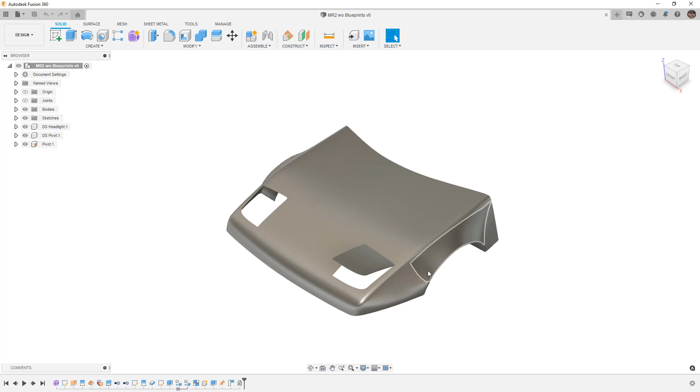I had a request in the comments about creating the bezel or the headlight surround for a pop-up headlight. Since we just finished the Ferrari series where we actually had a car with pop-up headlights, I thought it would be a good addition to maybe talk about some different tools and techniques that we can use to create that.

So what we have here is the front end of a 91 to 95, so the second gen MR2. So this is a car that still has pop-up headlights, and in my opinion, it's the best looking MR2. The first and the third gens just didn't quite have the same lines and looks as this car. So happy to get started modeling this and talk about the process.

Before we get started modeling everything, I want to take a second to talk about what I've already done in case you are starting out and you want to kind of backtrack with the things that I've done. So back to the original form body, I created a form body, and of course this is a surface, and I just used the same techniques that we used for the Ferrari. You can go in and you can modify this and you can add to it.

Some important differences or distinctions to this is I used a lot less control in the fender area. And the reason I did that is because this car has a relatively smooth transition from the wheel wells. This time frame, the early 90s, cars were starting to get really smooth. The FD RX-7, the 300ZX, 3000 GT, these cars had harder lines in some areas, but they were relatively smooth. So that was kind of fitting for the era. We didn't have any creases or hard edges like we did on the Ferrari to deal with.

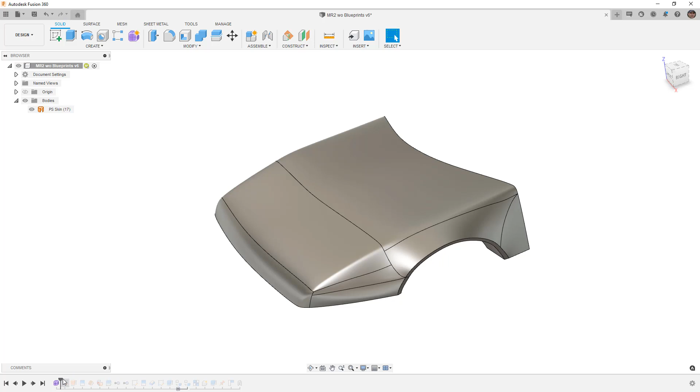So as we moved through there, the next thing I did was I created a sketch for where the pop-up headlight break should be. Now, we talked about this at the end of the Ferrari series, and sometimes you can use the trim tool or you can use the split face tool to actually split bodies up, but sometimes it just doesn't work. So I just went ahead and created some extruded surfaces, and I used those as my split tool.

Now, the original reason I did this is because I was intending to use these surfaces as part of the headlight surround, but I sort of abandoned that as I went further in the design. So I decided not to do that, and I ended up creating what we call a skin. So if I hide some of these bodies, what I did was I created basically an offset surface so that I had a body or an offset surface that I could use for the headlight bucket, and then I could delete the face and the body.

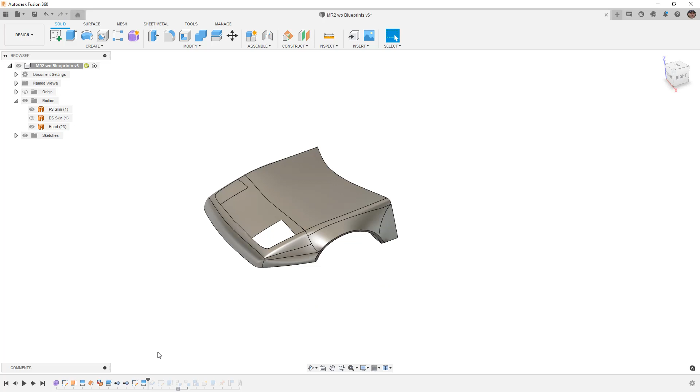I ended up splitting the other side using the same method, and then I started by creating a sketch to trim up the hood line. Now, this wasn't strictly required. I just did it for aesthetics. And then I just split the rest of the surfaces, so I had sort of a hood line. So you could pop up or remove the hood using the same techniques by creating an offset surface.

Next, I created a thickened version of the headlight. So if we hide the hood, you can see that we actually have something that has some thickness here. And in reality, this is essentially what you would have for the backside plastic piece that covers the headlight. And then I went in and I created a very, very generic pivot point for the headlight to pop up and down. I created a pivot shaft.

I converted the headlight bucket in this piece to components. Now, in reality, I could have started with them as components, but because I was basing this off of a form body that was a surface, I really didn't feel the need to start them as components because I was already hacking them from something else. And then I added a rigid group so that they moved as one.

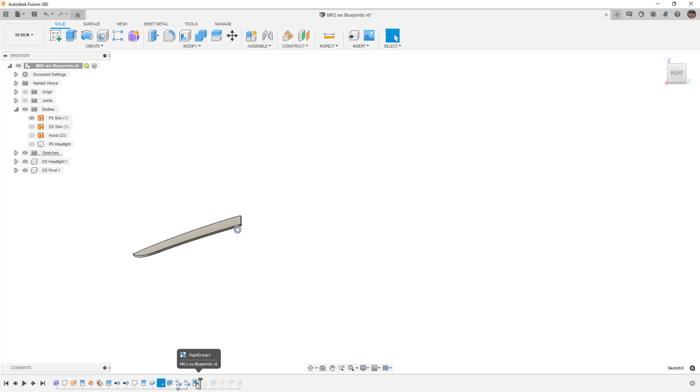I created a new component for the pivot itself. And again, very, very generic, just a rod, only just to represent the movement. I grounded the rod, and then I added a revolute joint, and I have a joint limit for the revolute joint.

And then you can see here that now the revolute joint has the upper limit, so it can't go any higher than this, and then it stops at the hood. So I did that by setting a joint limit, and you can do that by right-clicking on it and editing the joint limit. In this case, it was about a 28-degree sweep.

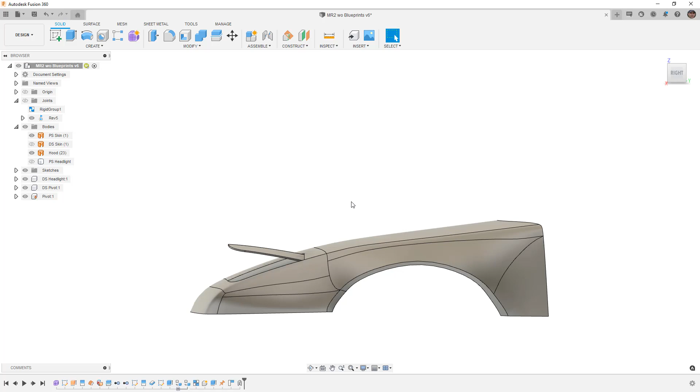On the actual car, it actually pops up a bit more. It depends on the car, obviously, but in this case, the original pops up more. But the request was to create a headlight surround for what's considered a rogue headlight kit. So it takes from the original square headlight design to a dual circle headlight design. So that was the request, that was the ask, and that's what we're going to do.

So I wasn't too concerned with having it pop up the exact amount. I really just chose that because visually it looked about right for what these rogue kits look like. So now that we understand what has been done, let's talk about what's still in here and what we can do. So I left what I call the driver's side skin in here, which was an offset copy of the split.

And I did that because in a lot of cases, you'll see when these headlights pop up, they'll actually try to match some of the body line and roll up into whatever shape they're doing. So I kept that there in case I needed it as either a trim surface or a reference. And I also have the original passenger side skin and the passenger side thickened headlight, which I didn't really add any joints or components to. I'm only working on this side over here. So that's where we are at.

That's the starting point. And now we're going to talk about different ways in which we can make the skin. The first thing that we need to do is have some sort of plane or planar face that we can use to define where the new headlights are going to be. And I'm going to do that with a surface. It could be done with a plane. The surface is helpful because I want to potentially use the surface as part of the rest of it.

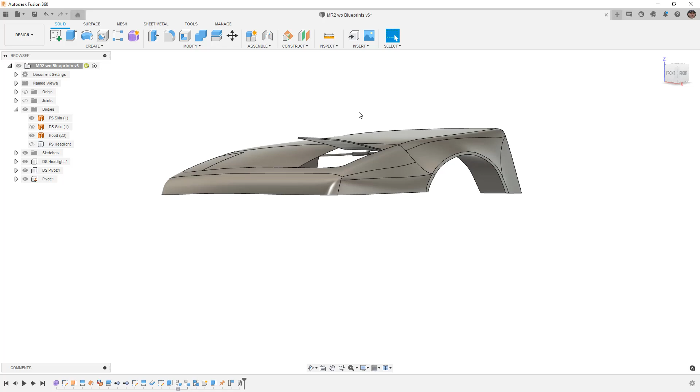Now, I will put a disclaimer in here. I haven't modeled this yet. This is the first time that I'm trying it. I've modeled the front of the car and the pop-up headlight part, but I haven't actually attempted making this bezel. So what we're going through here is my idea of how I would go about it, and hopefully it works, but we're going to just go along for the ride.

So we have to think about if we want this new bezel piece to be its own component or if we want it to be part of the driver's side headlight. Now, in reality, it could be a sub-assembly of the driver's side headlight pop-up piece and the pivot and all that stuff. So I'm going to make a new component, and I'm going to call this new component DS for driver's side headlight bezel. And that new component, I'm instantly going to go back to the top level and deactivate. And I'm going to make one more component. And this new component is going to be DS headlight assembly.

And the reason I'm doing this is because I'm going to restructure the browser a bit. I'm going to go ahead and reactivate the top. And even though we're talking about design techniques for modeling the bezel, we're going to get into some other basic assembly stuff as well. The reason that I want to do this is because it's going to produce a few problems, and I want to make sure we understand why those problems arise and what we can do to fix them potentially.

So now we have this assembly, DS headlight assembly, all the work that we've done before. We've got these components here. We've got a joint that is limiting it. We've got rigid groups and so on. But now I want to put the driver's side headlight, the pivot, not this main pivot. I'm going to leave that as part of the top level. This bezel, and I'm holding down the control key when I do this. I'm going to put those three, and I'm just going to drag them into the headlight assembly. The icon changes. Now this is a sub-assembly. And if I try to move this around, it's no longer joined together.

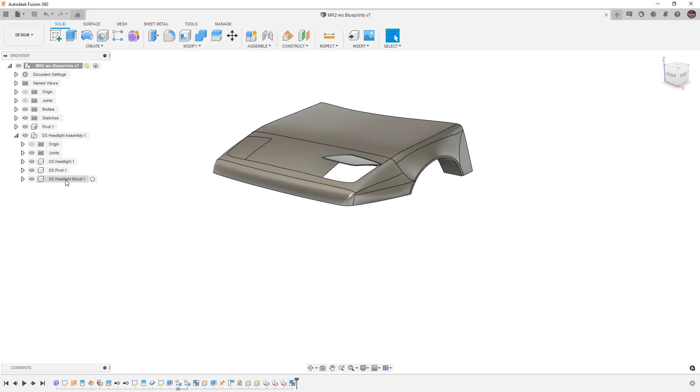All right. So the next thing we're going to do is activate the DS headlight bezel, the new component we created, which is currently empty. No sketches, no bodies, nothing other than its origin. And again, it's the same origin as everything else. Now that this is activated, I'm going to create a new sketch on the top plane, because I need to create the plane that my headlights are going to be on.

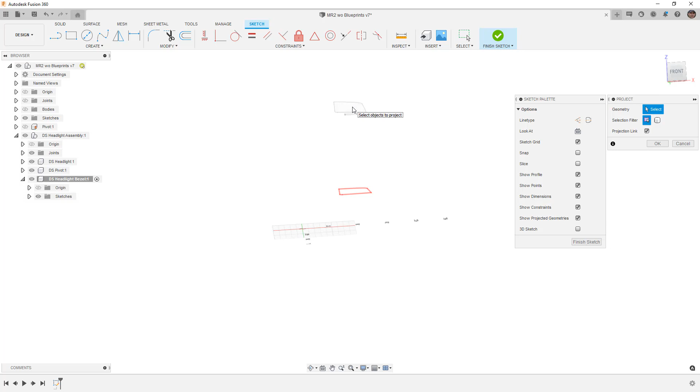So we're going to create a line, and I also want to use create, project, include, and project. I'm going to hide the entire bodies folder, and I'm going to hide the pivot. I don't really need to see that. I'm going to rotate this around. You might need to zoom back a little bit, noting that it's pivoting about the origin. I'm going to select that entire bottom face now that we're projecting and say OK. This redoes my grid, so now the grid is including this.

And if you are worried about the origin location, you can actually move the entire component so that the origin is based off of something real. This is based off the center of the car. When I drew this originally, I grabbed some very low-res blueprints online, but the blueprints were not under Creative Commons, so I deleted them out of the file before I shared it. That's how I know the shape of the headlight, the blueprints are just gone. So that's why everything is based off of that center point.

In reality, when you're modeling a car, that's usually how you do it. You pick the center of the car as the origin, but it doesn't have to be that way. You can put the origin wherever you want. It doesn't matter for what we're doing, because all we're concerned about is shapes of what we already have, and some references that are horizontal or vertical. So make sure you understand that the projection of this headlight is based off the bottom face of the headlight, and on the headlight in its up position.

That's going to be important because that profile does change. So it's in its up position. We understand exactly what the shape of this thing is, and we're going to design the bezel for that up position.

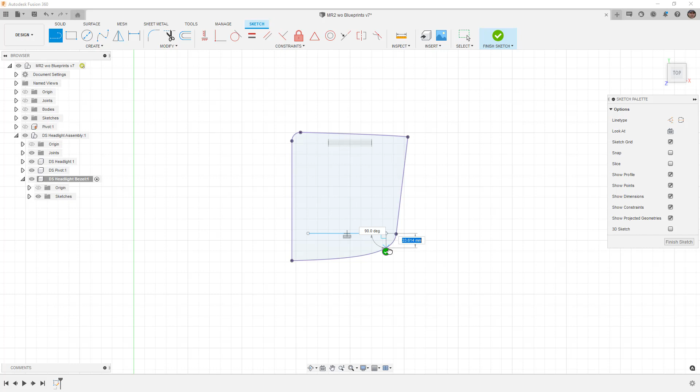I'm going to grab a line, and this is going to be a horizontal line. We can decide if we want it to go all the way to the profile or if we just want it to be inside somewhere. I don't really care so much about where it is—I want to make sure it's horizontal in relationship to my coordinate system.

That's how the car was drawn. I'm going to hit escape to get off the line tool. And now I need to decide how wide this thing needs to be and where it needs to be.

So this is where we're going to determine the plane of the headlights. In some cases those will be pretty close to the front. In most cases they'll be back behind some curvature, and then the bezel needs to come out from there. Because that's the challenge, that's what I'm going to do.

So we're going to use D on the keyboard. I'm going to set this at an arbitrary value of 175 millimeters. I'm going to put a horizontal distance from this point of 32, only because it looks about right. And then I'm going to either use horizontal or coincident constraint.

In this case I'm going to use coincident, because this is something most people don't know to use on things like this—so coincident for this line and this point. The reason that works is it's going to essentially extend the line out until it hits that point.

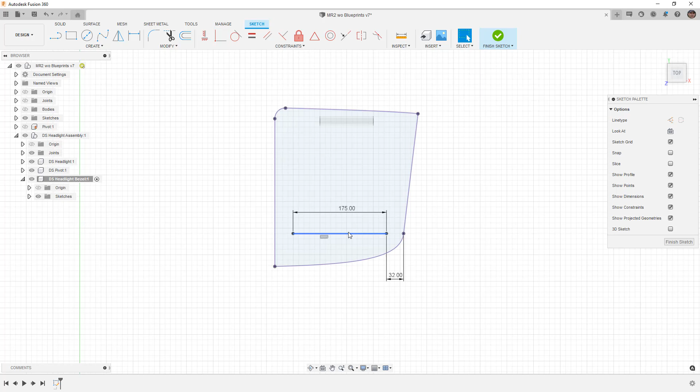We could have used horizontal here, and that would have worked as well. But I like using that trick, especially if you've got something at a funky angle.

For example, if we had some sort of pattern we were drawing and we wanted all of these things to point towards the center, and horizontal didn't work, you can use coincident to always have those pointing toward the center—like if you're designing a rim or something with concentricity, you want to make sure those lines point at the center.

All right, so now we've got this. I'm going to finish the sketch, and from here I'm going to move into surfaces. We could do a solid body, but it's not really needed yet, so I'm going to do an extrude.

I want to go back to my bodies folder. I'm going to expand this and bring in the DS skin—that's the driver's side skin.

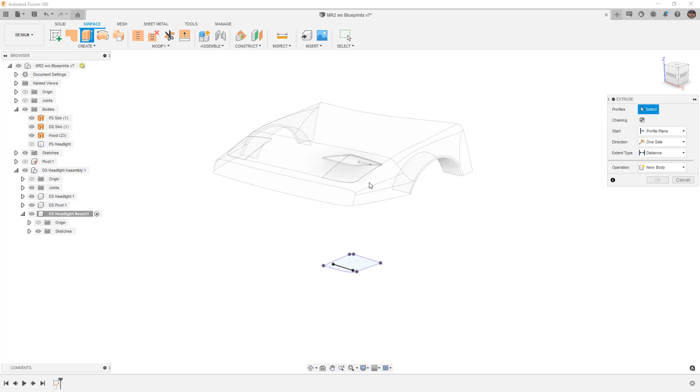I don't necessarily need it, but what we could do is take this line and start at this object—start here—and then move the extent type up to another object, and use the underside of this face.

So what we've done is created something where we don't have to go back and trim, scale, or split. We've simply gone directly from the original—the popped down or folded down surface—to the folded up surface.

The great thing about this is it gives us a planar reference, which means that if we select the surface—even though the top and bottom are not horizontal lines—we can right click and create a sketch directly on here. That's exactly what we're looking for.

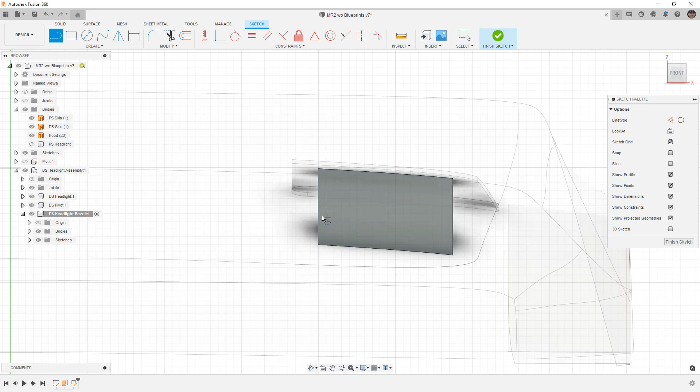So we're going to create a sketch, and now we need to represent the headlights. I'm going to use L on the keyboard for line, but you can also come up to create. And I'm going to grab the midpoint on the left side.

I don't really need to, but I'm just going to go all the way to the right, making it perpendicular. The only reason I have this here is it's a reference for me just to snap to, and again, I don't really need it.

I can select it and make it construction—you can use X on the keyboard. And then I can decide where I want my headlights.

If I want a larger headlight here and a smaller one there, we can give these dimensions as well. I'm going to use D on the keyboard—let's say we make this one 50 millimeters, which is roughly about 2 inches, and let's make this one bigger, let's make it 75. And if we want to, we can define their position, right?

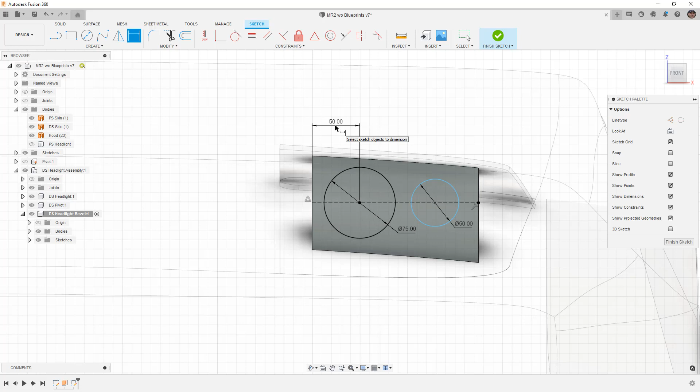We can give them a 50 millimeter dimension here, and then maybe we want to do 50 from this side as well. So now what we have is the location of the headlights, but we need to get rid of that information. So we either need to split the body or trim it or do something.

I'm going to use the trim tool, and the trim tool is going to be this sketch, and then I need to select where I want to remove. In this case, I'm going to remove the center. The trim tool is one of the only tools that I am aware of that leaves the sketch visible. Most other tools like extrude or revolve are going to make the sketch hidden automatically. So this actually helps us because we want to repeat the process by removing it from there. And then we can go into our sketches folder and we can hide it.

So now we have a planar reference. We have a plane where the headlights are going to be. And this reference can now be used to help define a form body or a surface body or whatever we need. So the next thing that we need to consider with this, also I should make a quick side note.

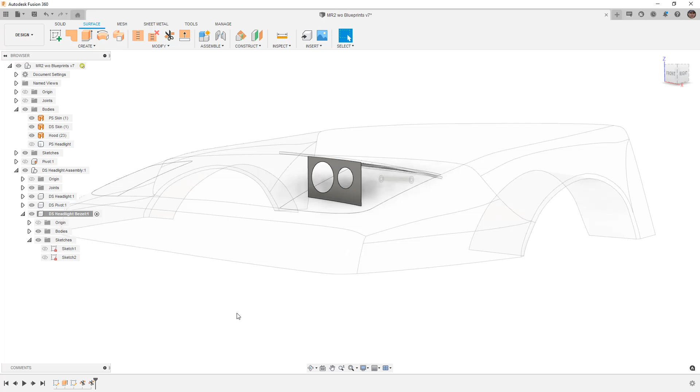I haven't taken into account any tolerances. But what I mean by that is the headlight pop-up face is exactly the size that I split it away from the rest of the body. Now, obviously, there are going to be gaps, and you have to account for those. So, for example, if the headlights were exactly 50 and 75 millimeters, then the circles that we drew need to be a little bit larger. You need to have some flexibility there.

But what we can do from here is we can actually do a handful of things. If we have mounting holes on the side of it, so let's say that we were actually building this entire assembly ourselves, we can use tools like Extend, and we can grab this edge, and the type can be perpendicular. And we can simply extend an edge back. I'm going to hold down the Control key on a PC, and notice that when I do that, the inputs are not connected and it doesn't like it. So we're going to have to do those individually if we are trying to build it this way.

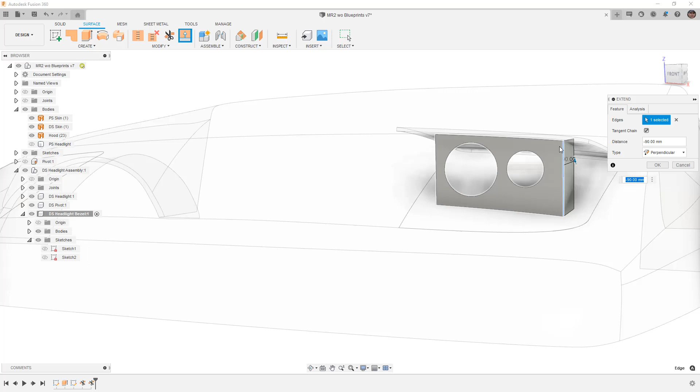But you can see that now we have this sort of planar reference. This is going to be a flat plane that we can sketch on. We can put a bolt hole location, and it's completely perpendicular to the face of the lights. So whenever we're building some sort of assembly or a mount, this type of tool, such as Extend, can be extremely helpful.

Then we can come back with Trim, and the Trim tool can be the original pop-up portion, and I can rotate this around and remove that. We can do the same thing if we repeat Trim and use the inside face of our solid body. So even though it's a solid, we can use that as our Trim tool. And now we've trimmed that planar reference. And again, we can sketch on this.

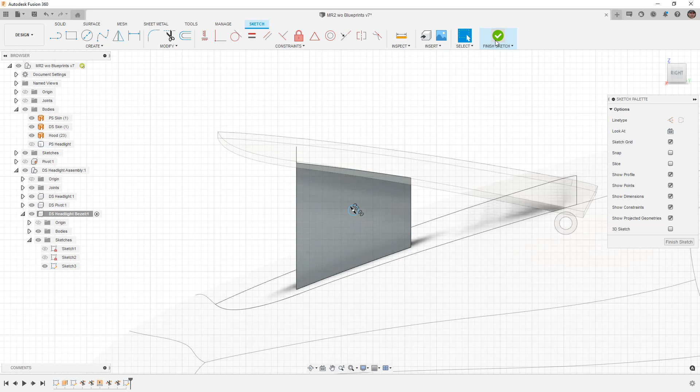We can create a sketch. We can put a bolt hole location. Let's say that we have an 8 millimeter bolt hole. I'm not going to worry about dimensioning it, but you certainly could, and you should, obviously, if you're trying to replicate or build something.

But now we have that hole reference. So if this was going to be a mounting post, we could extrude it as a solid. Or if it was going to be a bolt hole location, we could just use Trim and cut it away from our surface. So that's a Trim tool, get rid of that. And now we have a bolt hole location. So that is something that we can do.

And we should always be mindful of the fact that tools like Extend are going to stitch or knit those bodies together automatically. So you can see there's a 2 here, which means it's got 2 faces, 1 and 2, but it's one single body. So that entire thing, even though it's selected now, that entire thing is one solid body. So keep in mind that when you use tools like extend, it is actually extending the surface. Even though it's perpendicular, it's extending that back.

Okay, one last tip for you on this, and then we'll move on and we'll start to actually create some cool geometry. If you are going to do something like fillet this corner, you should fillet this before you trim it.

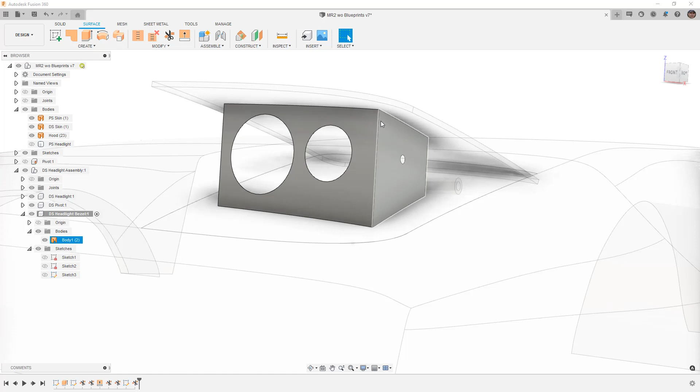And the reason for that is because when you create a fillet on a corner like this, if we go to modify and fillet and start to pull this in, there's no guarantee it's going to perfectly match those trimmed surfaces. In this case, it's probably fine because the trimmed surfaces are single faces, not very complex, but that's not always the case. So it's a good idea to build that geometry first, add the fillets and detail you want, then go back and trim afterwards.

Again, it's not always required. In this case, we have one big, fairly broad surface and another one here, so it's actually going to do pretty well, but it's not guaranteed, so keep that in mind.

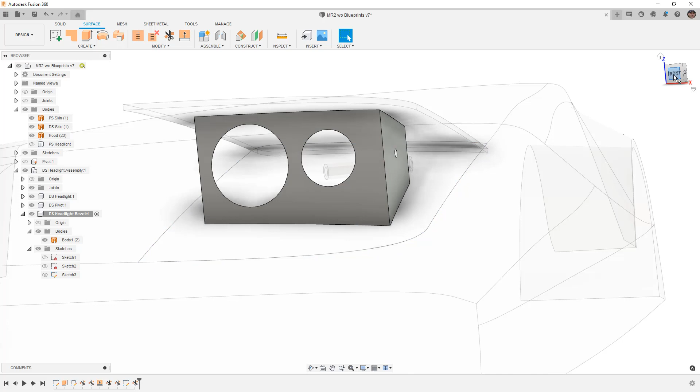Okay, so now that we're here, this is where we've got the pop-up headlight. If I try to move this up and down, you can see that goes with it. If we rotate it from the side, you can see that it rotates with it. That's because it is a component that we created, even though we didn't have any geometry. It was a component we created in the headlight subassembly, and it's all created as a rigid group, which means everything we do in this bezel, even though it's a surface, is going to move with the solid body. It's going to move and respect all of the other joints we've applied.

So now that we understand it's going to move, we've got everything in place, we have our planar reference, we have our headlights. Now, how do we design a bezel?

All right, so this can be done several different ways, and part of it's going to depend on what you want it to look like. The first approach we're going to take, and I know we're already 20 minutes plus into this, it's only going to be a single video, so if this is interesting to you, just hang on, we're going to get there. We're going to take the approach of first doing this with some surfaces, and then we're going to try to do it with some form tools. So we're going to have at least another 10 or maybe 20 minutes in. Keep that in mind.

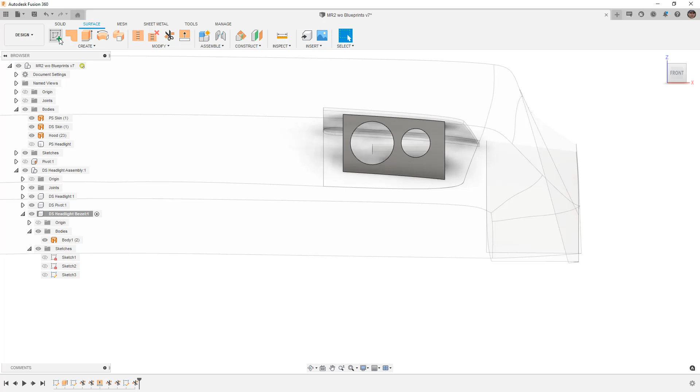We're going to get there. So from here, we're going to create another sketch. We're going to use the top plane again. We actually could use a sketch that we already have, but just in case you are going to be using different geometry, I think it's important that we use a new sketch.

So I'm going to hide the hood. I don't really need to see it. I don't really need to see the passenger side body, and I don't really need to see the driver's side skin at this point in time. What I need to do is rotate this around, and I'm going to use my mouse wheel. As I'm holding down the shift key, that's how I rotate, shift and the middle mouse wheel. If you click the middle mouse wheel, you're going to reset the pivot point. That's especially helpful on something like this where the origin is way away from our object. It's going to help us rotate this a little bit easier.

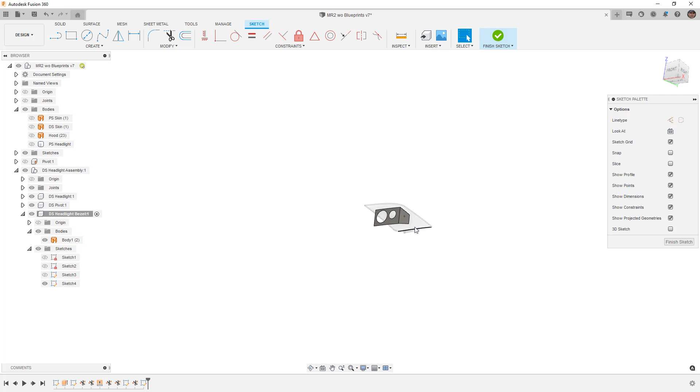So I've got that face selected. P on the keyboard, or create, project, include, and project will allow us to project that entire face back down to the top plane. So from here, what we're going to do is extrude this up as a surface. I don't actually need to worry about the back, all I need to worry about is the two sides and the front. So if we want, we can select these two edges holding down Control or Shift, or if you're on a Mac, you can use Command, and we can convert those to construction either by using this option here or hitting X on the keyboard.

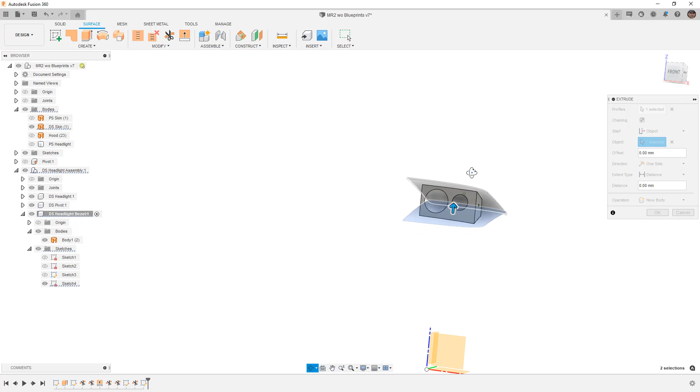I'm going to finish the sketch, and now I'm going to bring back my driver's side headlight skin. We're going to use extrude again, the same thing we did to create the front face for our headlights. We're going to extrude this, going from an object, which is our DS headlight skin. We're going to rotate again, click the middle mouse wheel to reset that pivot, and we're going to go to an object, and here we're going to go to here. Notice that nothing is being shown right now, and it's failing.

The reason that it's failing is because it's an exact match for this shape, but it's not an exact match for this shape. We didn't offset it in at all. Now, in reality, it wouldn't match the edge perfectly. So what we can do is we can either offset this curve in, or we can come up with a solution by extending the headlight skin. Either option is going to be fine.

If you want to use the option of extending the headlight skin to trim it, then we just need to simply come from the profile plane all the way up, or we need to extend everything that we're doing here. So because it's going to be problematic and because time is of interest to us, I'm going to go ahead and edit this sketch, keeping in mind that I already created a construction version on the back.

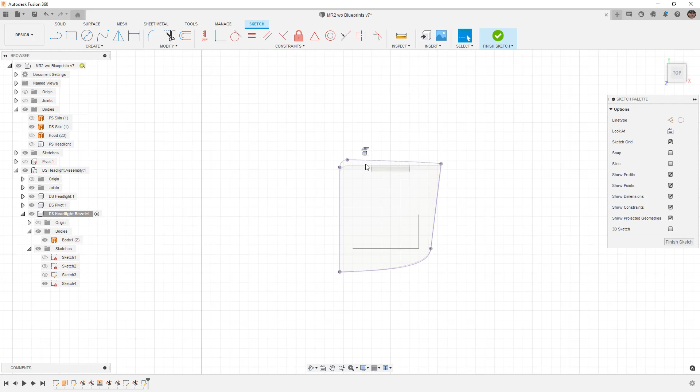And from this view, you can actually see what we're working with. We can see the headlight piece here, but we can also see the headlight skin. So you can see right here, our edges extend past where we want them to, and that's part of the problem that we're running into. We're going to push forward, and I'm going to use offset, which is in modify offset. I'm going to select this, and I'm going to bring it in, and we need to decide how much. I'm going to say -5 millimeters and say OK.

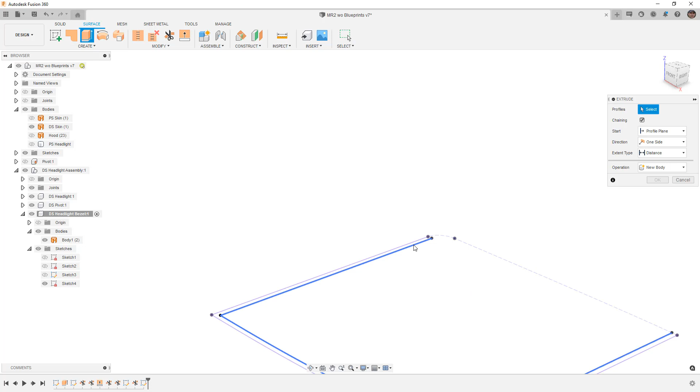When we do that, we do want to make sure that we're not extending past this back edge, and you can see that we are. We're going to try it anyways, but just note that we do see that. So once again, we're going to extrude. This time we want to select the inside chain. We're going to try to go from an object one more time. It's probably not going to work, but we'll try it. And then we're going to try to go to an object.

Again, middle mouse wheel, click, and instead of that, I want to go to this inside face. Notice again, it's giving us problems. It's giving us an option where we can either use the adjacent faces or the selected faces. If you use the selected faces, you'll notice the icon shows it stopping. Adjacent faces will actually carry those faces on. The starting point is causing a problem. So if we try profile plane, you can see that it's still not working.

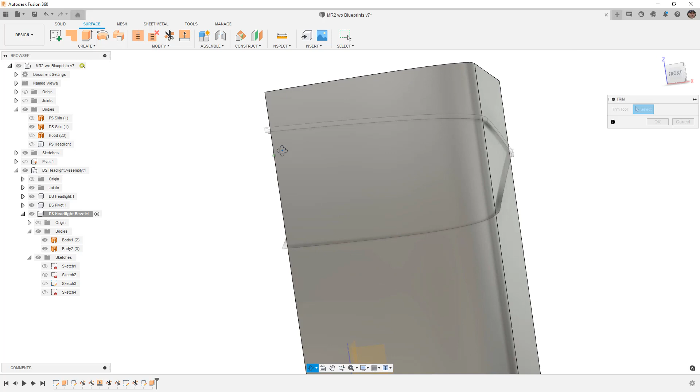So let's go ahead and let's just do distance. Let's bring this past everything, and then let's see if we can work with it like that. I'm going to say OK. And now we need to trim this. So I'm going to use the trim. I'm going to rotate this around. My trim tool is going to be the inside face, and then the trim is going to be this outside section, and I'm going to say OK. So notice it allowed me to trim that.

Let's try that again. Right click, repeat trim. This is my trim surface. I want to get rid of everything below it. All right, so you can see that that worked. That allowed me to create that bezel. It's still a surface body. We haven't thickened it or done anything with it yet. It's still a surface. So now we need to figure out how to go between this to our headlight, which is set pretty far back, honestly. We could bring the headlight up quite a bit more if we wanted to, but let's just see what we can do.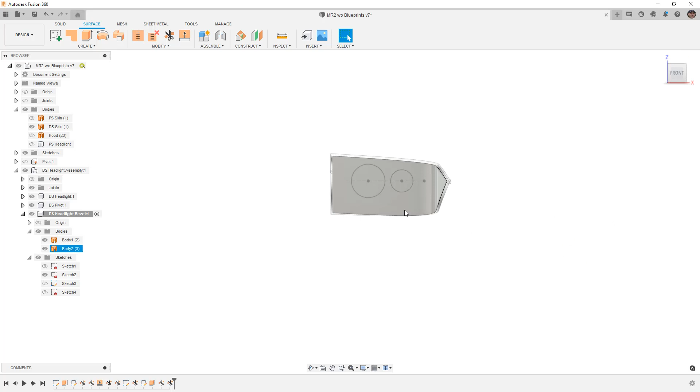So the next thing that I want to do is I want to find the sketch that I used for my headlight. So these are the circles that I drew. Next, I'm going to rotate this around, double click the mouse wheel to center, but again, it's the entire car, so we need to zoom in. I need to decide if I want to sketch on the same face that I used for my headlight, or if I just want to grab the front plane.

In this case, I'm going to sketch on the same one that I used for the headlight pivot, but I want to temporarily hide that sketch, and I'm just going to right click on this face and create sketch. Now what that does is it automatically projects everything for us. So if I hide that body and I select this face, you can see the profile already has those edges for me, so I don't even need to show that other sketch. What I do want to do is show the body that we're interested in sketching on.

So in reality, what we want to do is we want to project these circles forward to give us something to loft to. Now, I'm not actually sketching on this surface, so I can't really project them to the surface, at least not yet. So what I need to do is I need to draw the sizes that I need. So using my circle tool, I'm going to find the center of that circle, and I want to draw a little bit larger. In this case, I'm going to go to 85 millimeters.

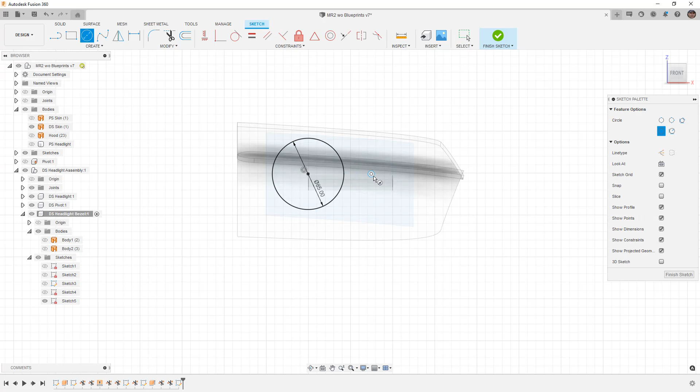I'm going to do the same thing over here. This one was 50, and I'm going to go to 60 millimeters. From here, I want to bring back the body I'm interested in, and I'm going to finish sketch. Now I'm going to trim. Using that as my trim tool, get rid of that section. And again, right-click marking menu.

If you get really good at the marking menu, what you can do is actually hold the right mouse button down really quick and just drag up, and it'll go right to that tool. So I do it slowly just so that we can see what's going on, but you can get that done pretty quickly. Okay, let's bring all the bodies back. Now we have the planar face reference for the headlight, and now we have this extended piece here. Now, what we want to do is we want to connect those.

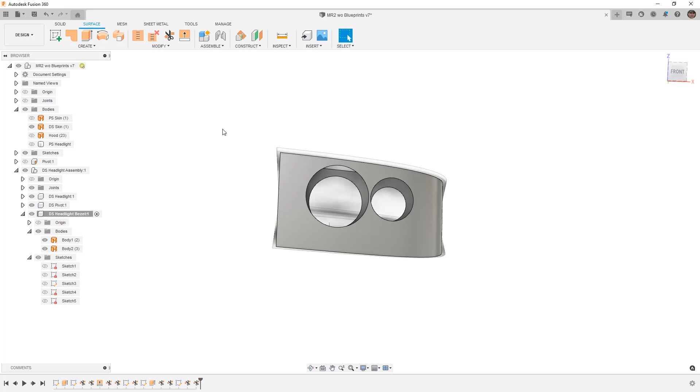Depending on the headlights, obviously these two are pretty far apart, but depending on the headlights, the headlight angle, you could do this a couple different ways. We could simply come in and loft from this edge to this one and just leave it straight. Now, this is great, especially if you can match the angle of the headlight, maybe pull this face a little bit closer. That's a good option.

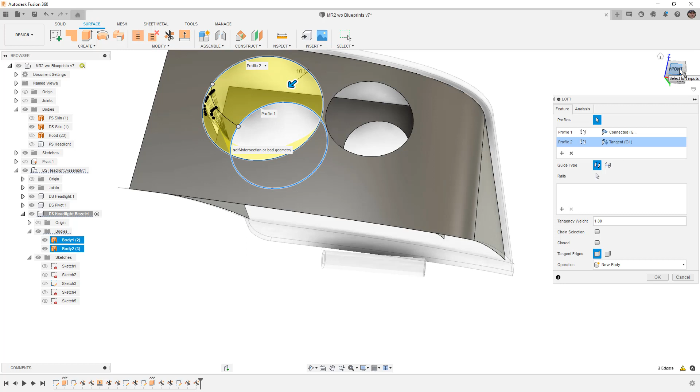Another way that we can do this is we can determine how we want to enter and exit these curves. So on the front end, where it's visible, we might want to have tangency or curvature. I'm going to select tangency, and notice that it gets a bit crazy. The reason it gets a bit crazy is right now, the profile is not liking that transition because it's creating what's called self-intersecting geometry. If we view this from the front, all of these little angles here, these edges are self-intersecting.

And if we rotate this around, sometimes we can get these points to a location where it's okay. You can see here we have a preview, but it's creating self-intersecting geometry. And another thing that we want to note is that this number here, this tangency weight, is controlling how much the tangency of this edge matters. So if I say 0.5 and reduce that tangency, it might help.

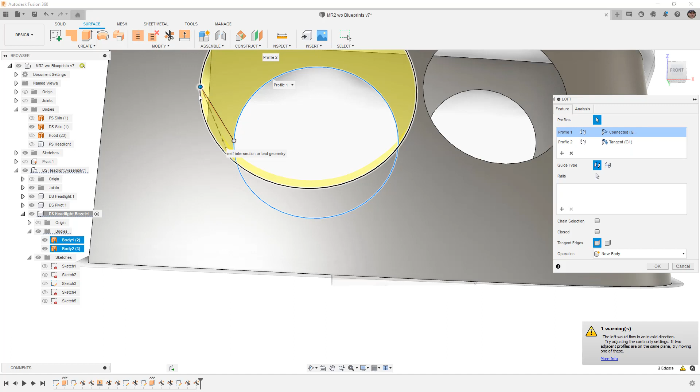The back edge, profile 1, right now is connected. And we don't really want to have that back edge tangent because of this plane, unless we extruded that edge back more like an axis for where the headlight is. So you can see that this one is causing problems. Let's try curvature and just see if it gives us any better solution. But you can see that the loft is still not being created. If we rotate this around, it is just not liking that transition.

And the reason it's not liking that transition is because it doesn't have enough room to get the transition how it's trying to. So the way that we could fix this, if we needed that curvature or that smooth edge on the front, is we could come back and we could create what's called a guide rail. And that guide rail will help us drive the shape a bit more. Because the main intention of this is really to get to the more complicated one using forms, I'm not going to go through that process.

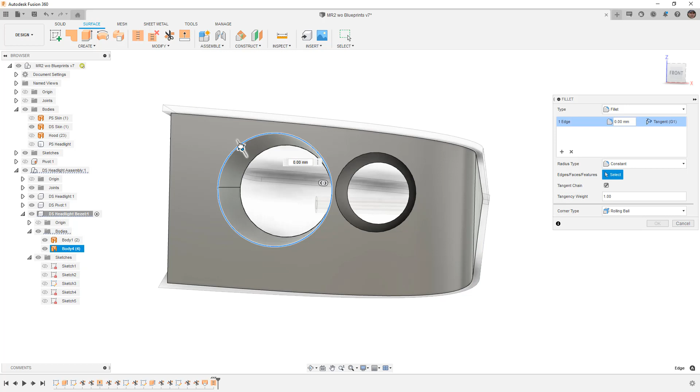Instead, what we could do is we could stitch these together. So for example, we can select stitch these two together, and then we can add a fillet, modify fillet, select this edge, and then we can round it off and create it that way. You'll notice that it's cutting into this edge here, so I'm not going to do it just yet. But again, that is an option. Let's go ahead while we're here.

Let's just loft from this one to this one. Again, those points are important, and I'm going to stitch these two together. These could all be done at the same time. And now what we've created is a very basic bezel. We could take this surface body, we could thicken it. In this case, I'm just going to say 2 millimeters.

It can be thickened outward or inward. We could just pick which side we want. In this case, to go the other direction, I would say -2 millimeters to thicken it inward. And now we have a solid body. So if we look at this, you can see that we have a solid body.

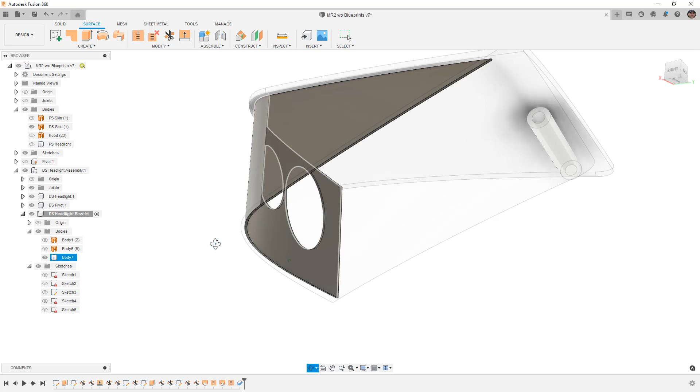It didn't bring those stitched sections in. And if it didn't, we can undo. We can take a look at this entire body and we can try to thicken the entire body. What we did was we selected a face. And when we select a face, sometimes it doesn't bring those along with it. Now you can see that the solid body does include those.

We could add fillets to it. We could add details like mounting bosses and cut holes in it. But now we have a thin bezel, and the thin bezel matches the bottom shape of the car when it's open, and it also all moves with it. So it closes and it opens, and now we have that bezel.

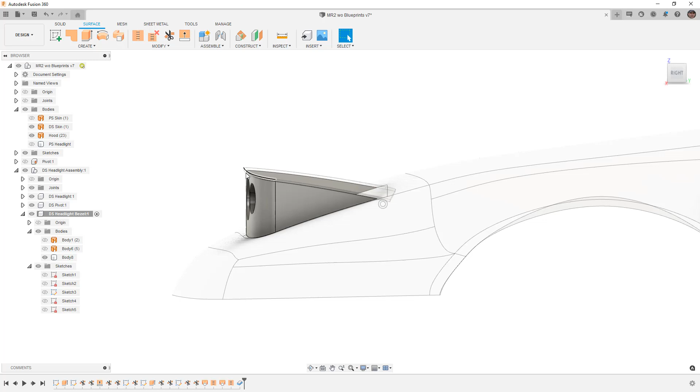All right, I know we're pretty far in. We are 30 minutes in. Let's move on to creating a form body. Let's try to create a form body of the same thing. I'm going to do the form body in this headlight bezel component so that they're all together. It doesn't necessarily have to be done that way, but let's do a quick save before we move on.

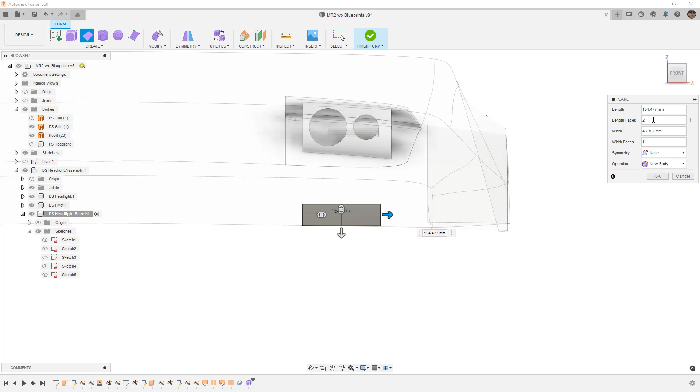So back on the solid menu, we're going to select create form. And create form, in this case, we have to be kind of careful how we do it. We can do this with extrudes and we can use some of the primitives. I'm going to start with a plane, and I'm going to create the plane just on the front. I'm going to go to a front view, and I'm just going to create just a little bit of a rectangle. For the width faces, I'm going to set this to 1. And for the length faces, I'm going to set this to 1.

You can see that it doesn't really like that. We can move this up and down. It really wants to have 2. Let's go ahead and put 2 in there, and that'll be okay for what we're doing. The reason I wanted 1 is because I didn't want to have too much control. So at this point, I'm just going to select those bottom ones and hit delete. So now I just have these 2 faces here, 2 edges on top, 3 vertices to control, and then this sort of vertical edge below it. So I'm going to box select everything, go to modify, edit form.

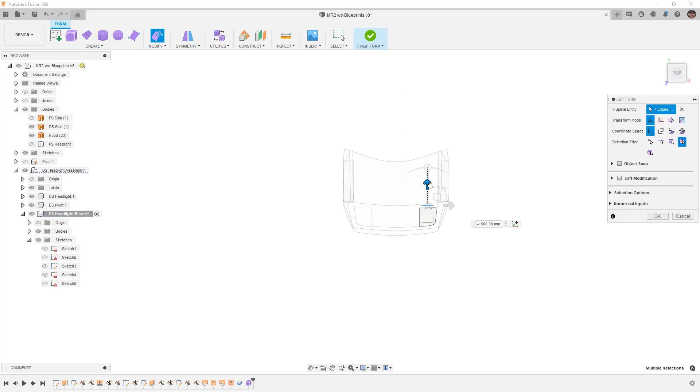I'm going to put it up in roughly the right spot here, probably rotate it just a little bit. Then from the top view, I need to make sure that it's in the right spot and need to bring it forward. So grab the arrow, bring it forward, and then we need to figure out where we're going to put this. So I'm going to bring it all the way forward. I'm going to box select. Remember, I'm grabbing both of those vertices, and I'll do the same thing here, bring it back.

I am also going to go into box display mode, which is Alt and the number 1. We can also go to selection options, and display mode is here as well, so you can do that directly inside of edit form. All right. So I really want to cover just a few tips here. So we're going to hide the hood surface body. We're left with the DS skin, and we're left with the solid body up top and also where our headlights are.

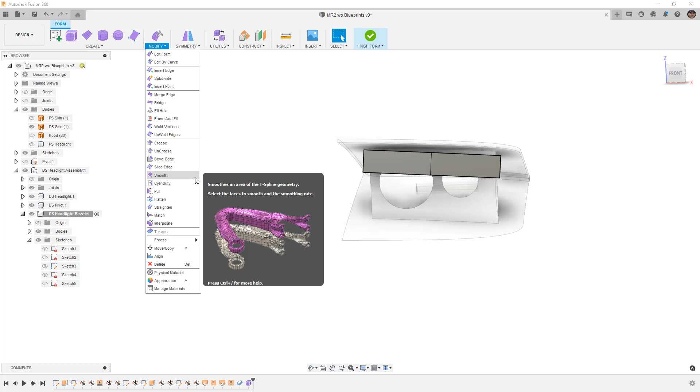So the first thing that I want to do is I want to go to modify and note that we have a couple tools. We have match and we have pull. When we've looked at these in other series, I did one creating a spoiler on a model that was a surface body, and we converted it to mesh, and we kind of looked at that. If you haven't seen that, you can go ahead and watch that video, but we're going to talk about these two here.

When we look at pull, you can see that there's a target, auto option, and selected targets. When we do selected targets, I can select a surface or a face, and it's going to automatically grab the border. When I select vertices, it's going to push them up. And one thing you'll note is it's set to surface points right now, so the control points don't look like they're touching.

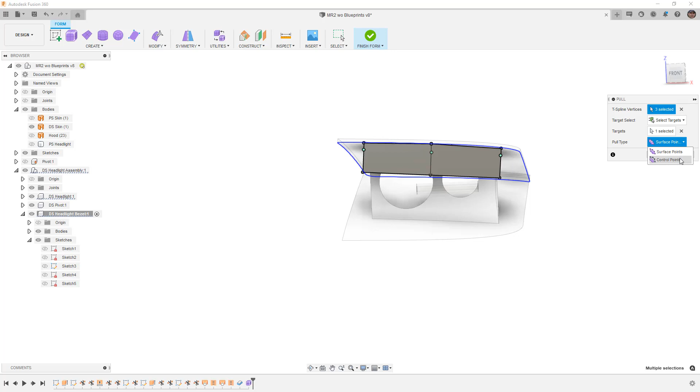But if we were to go into smooth display mode, which again is Alt and the number 3, then in smooth display, those vertices are actually touching those edges. We can also change it to control points, which means that the box display will touch. In this case, because we're talking about the edge of a surface, it doesn't really matter. Either of those is going to give the same result. But just note what it's doing is it's pushing those vertices to try to touch that surface.

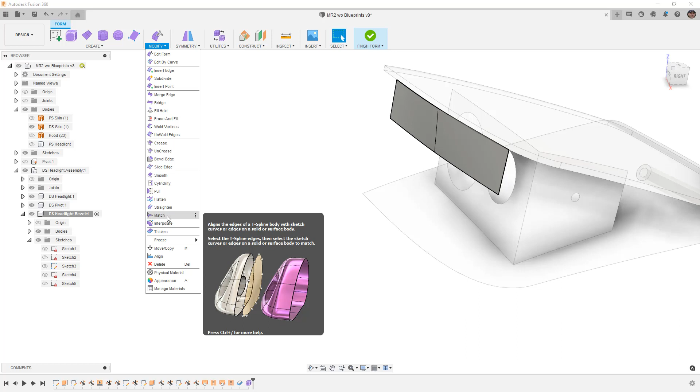Now, if we change the target and we select the edge, you'll notice that the result is a bit different. Instead of pushing it up and trying to touch the surface, those points are now being pushed to that edge. So that's the pull tool. If we take a look at the other tool that we have in here called match, now this match tool is looking at the sketch or edges of a surface or solid body. So they're very similar, except the pull tool works on mesh bodies.

So if we take this edge, you notice that it's not allowing us to select a vertex. We take those edges and we're trying to match this edge. It gets a little crazy. We have to turn off tangent and we have to try to select a specific edge. But you can see here it took the entire edge of what we had and it's trying to match the edge that we selected. So this is one of those cases where the match tool is probably going to give us a better option than the pull tool, unless you really need a lot of control of selecting those vertices.

Also notice that there are some options. We can determine some tolerances. We can use this falloff option, which allows us to control how much of the rest of the shape is influenced. It's not going to change anything for us because we don't have any vertices in the middle. We did that on purpose. So we're going to just go ahead and say okay.

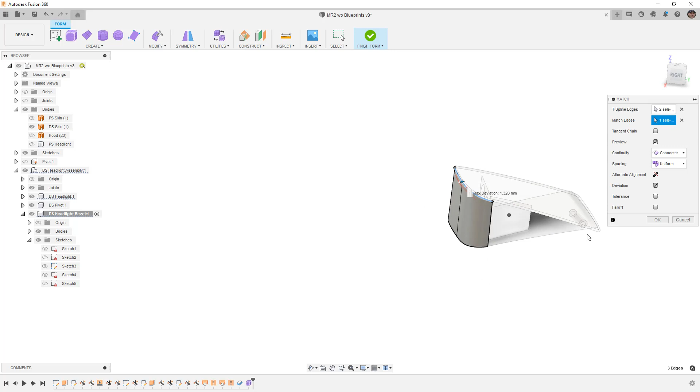I'm going to double click this upper edge and I'm going to bring it down a ways. And then I'm going to use that same match tool. I'm going to select these edges. And again, tangent chain is turned off because we don't want it to go kind of crazy. But note that we can select more if we want to. So this is the basics. This is the starting point of that cage, right? So hopefully you can see just looking at this that we could divide this up more and have it wrap around. And let's go ahead and do that.

Again, this video unfortunately is going to go on for a bit, but if this is something you're trying to do, then hopefully it's interesting.

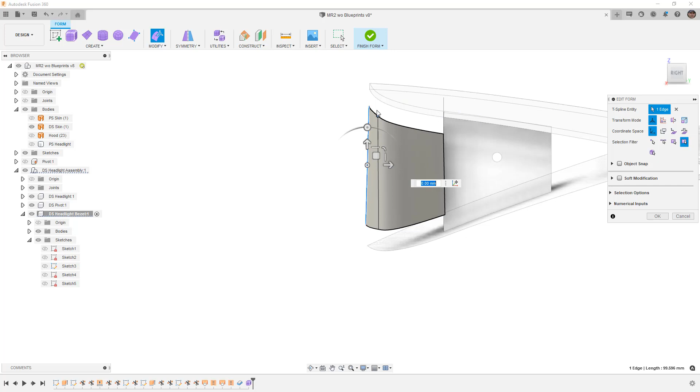So let's pull that up. Let's say okay. Also note, when we go back to box display, you can see what the box display looks like. Smooth display looks pretty good. We don't need a lot of control in order to match this. What I'm going to do is take this back edge, Modify, Edit Form. I'm going to go to the right view, and I'm going to use Alt and Control. The reason I'm doing that is because I have a sharp corner there. I'm going to use Alt and Control and bring that back. I'm going to take this edge, just using Alt, and bring this one back. And I'm going to say okay.

So let's see how this works and how it handles the corner here. I'm going to rotate this a little bit, zoom in. Let's go to Modify, all the way down to Match. My T-spline edges are going to be all the ones on the top. My match edges, again, tangent chain is turned off, and I want to select these 3 edges. I'm going to say OK. I'm going to repeat the process.

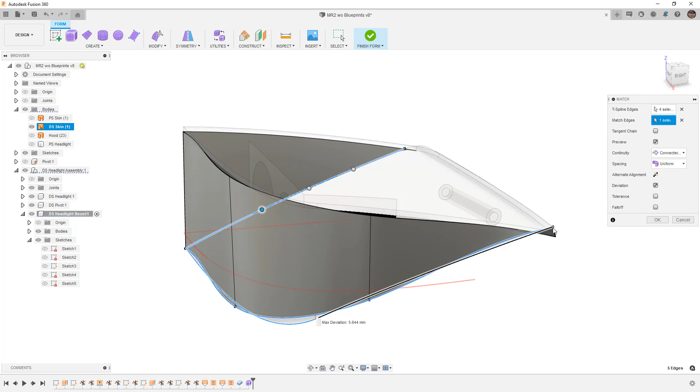So again, we're going to select all of the edges that we're interested in. Match edges, tangent chain is turned off because we don't want to go all the way around. And now you can see that it's pretty close, but there is a problem back here. So you can see that in reality, we might want to split this thing up, potentially move those around, but you can see that we do have a result. And part of the problem is the surface on the bottom crosses the surface on the top just by the nature of the headlight pivot.

So we need to do some manual work here. I'm going to take this and I'm just going to pull this forward a bit. We're not going to match that shape anymore, but again, hopefully you can see that. And actually, you know what? Let's cancel that. Let's do this a little bit differently.

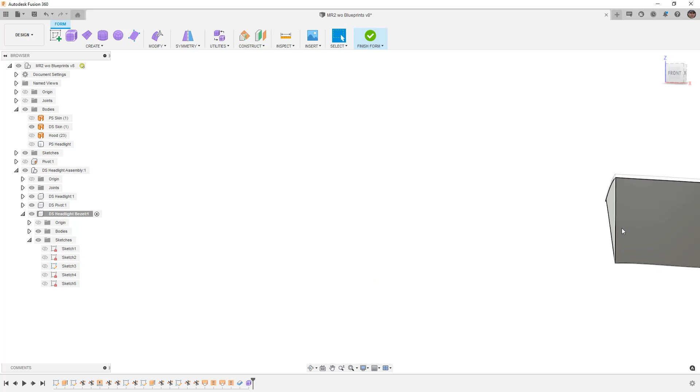Because we are so interested in matching that, let's use insert point. And let's go from here to here. And then select this face and delete it. We'll do the same thing on the other side. Again, middle mouse button while you're rotating will help you reset that pivot. And I'm going to go to insert point. And it's not really giving me the same graphical preview, but let's go ahead and delete that.

So we lost a little bit of the shape, but hopefully you can see with a little bit more prep work. As I mentioned, I didn't pre-model this, so you're kind of seeing this happen on the fly. So hopefully you can see with maybe a little bit more thought put into this underlying surface. Maybe if we trimmed it, it would have been a lot cleaner.

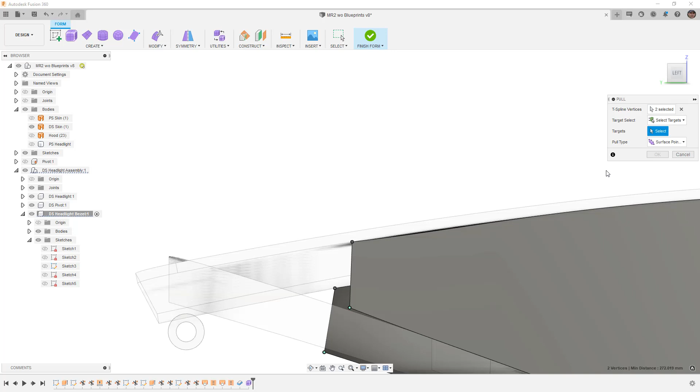We can still fix this by using modify and pull. And we can take this vertice and maybe this vertice. We can take it up to our selected target, which is this face, and just pull them up. We can repeat that process using the lower vertices, and the target is going to be this bottom surface. And that gets us back into matching that shape using both of those tools.

We have a crease on this edge. You can see that it's kind of rolling in a little bit. So if we want to, we can make some manual edits to this. We can come in and modify and maybe pull this corner back a little bit. And it is hurting us because we have so little control on this. So we might want to add another edge in here. Modify, insert edge right in the middle.

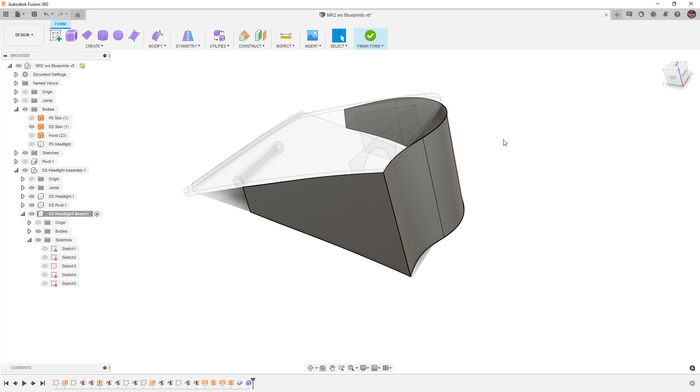And then go back to modify, and we're going to use match. This time we're just going to select these 2, and then the match edge will be that right there. And now you can see it messes everything up. So let's go ahead and hit cancel. We'll use pull for this one. So we'll pull these 2 vertices, and the selection is going to be this edge. It'll just pull those back. We'll say okay. As you can see, it's starting to get a little bit out of control.

So I'm going to use Control Z. And we're just going to have to roll with that, unfortunately. I could spend a lot more time and sort of tweak this to get it a little bit better, but I'm just going to get it close, and hopefully you can see or understand what we're doing in order to get that.

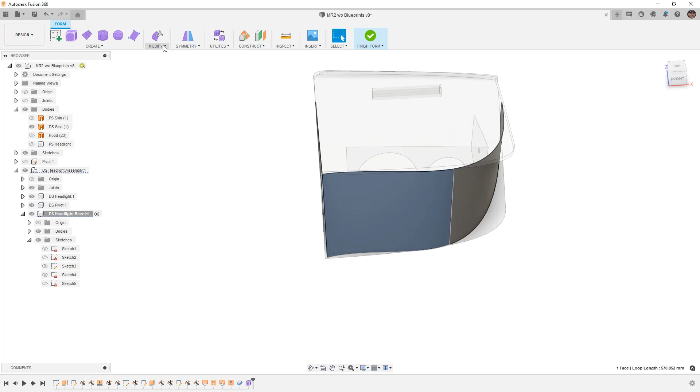The next important thing that we need to do is we need to figure out how to transition from this to the headlight itself, right? So we need to be able to extrude something back, and that's probably the next biggest challenge. So let's go ahead and tackle that. And to do that, we're going to need some more divisions. So I'm going to select this face. I'm going to go in, I'm going to modify and subdivide it.

When we subdivide it, you can see that it's starting to mess up our curvature again. We're going to do an exact, which will keep it in the right location. We can also specify if we want to increase the number of faces so that we have something that we can delete, then we can do that. We're going to say okay. I'm going to take this and I need to get rid of it. Now, ideally what we would do is we would use something like bridge, and we would bridge back to that edge. We don't have that option, unfortunately.

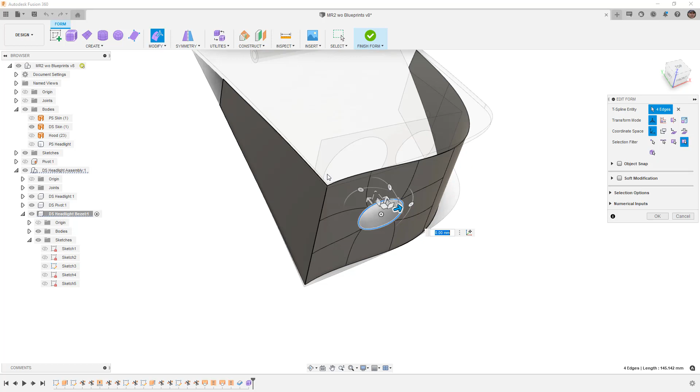So I'm going to hit delete, and notice that the edge it gives me is round. It's automatically trying to make it round. I'm going to double click on that, go to modify, edit form, hold down Alt and pull this back. I'm going to let it go once I'm right about where the headlight is, and I'm going to say okay.

Hopefully you can already see where we're going, but we're going to use our tools, right? So we're going to use match. I'm going to double click that to grab the entire edge. Then I'm going to select this edge, and you can see that we're matching the headlight shape. We're going to say okay.

And if we want to keep this as is, I can double click on it. I can go to Modify, and I can go down to Freeze. Freeze will ensure that that edge doesn't move, and if it does, it'll give us a warning.

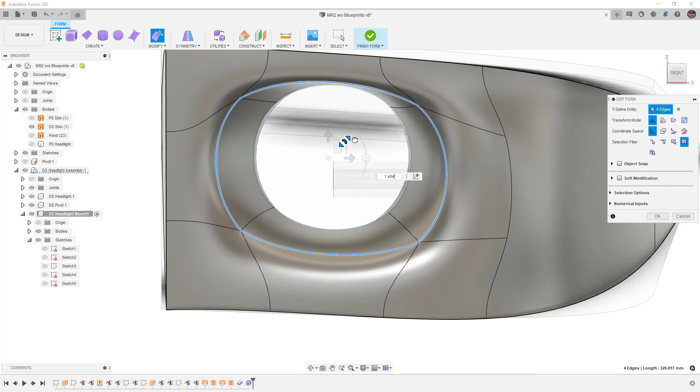So now I can take these edges. I'm going to hold down Control, or Command if you're on a Mac, go to Modify, view this from the front. Let's find where it is. View this from the front and scale them out, maybe moving it a little bit so that I'm better in line with the headlight. And you can see that we're starting to create this shape.

Now, if you want more control, obviously you can add more edges, more subdivides, or just insert points wherever you need the control. If you want this to be creased, then we can do that as well. We can select it, again using Control or Command, grab these edges, and we'll go to Modify and Crease.

Now, if we crease it, it's obviously going to change this, but now we can come in and add things like a bevel. So if we want a beveled edge, we're going to put it relatively close, 0.05, and I'm going to say 2 segments and say OK.

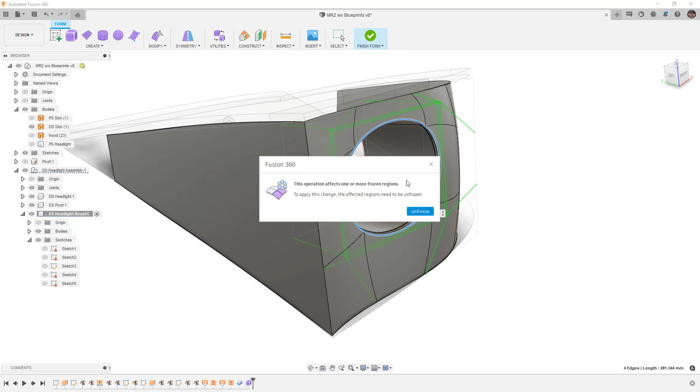Notice that it's telling me that it's going to unfreeze some of our regions. It's affecting the curvature too much, and that it's causing it to affect where we wanted to fix it. So I'm going to say cancel. I'm going to double click this edge and I'm going to insert another edge.

Notice that it's trying to put it on the front. That's not where I want it. Sometimes if we use a negative value here, let's say 0.5, it will allow us to switch the direction. But you can see that it's automatically changing it to the opposite side. And there's not a good way that I know of. If you guys have run across this before and know of a good way to get it to be on the correct side, please let me know.

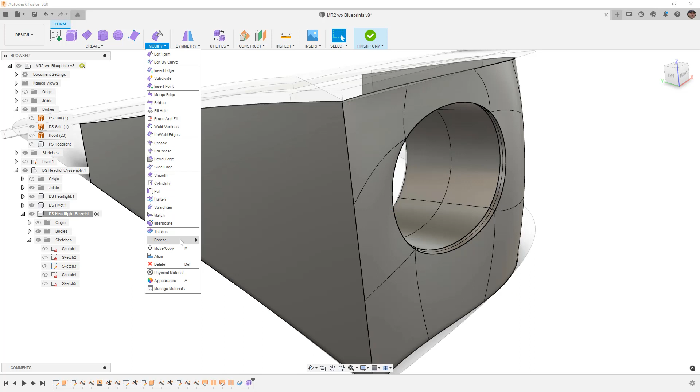I'm going to do it by just double clicking the back and putting it in here and saying OK. And now what this does is it puts sort of an edge between our frozen edge and what we want to modify. So if we go back to freeze, this edge may have been unfrozen, so we want to make sure that it's frozen.

And now for this bevel, we can come in and uncrease it. I want to uncrease this one as well. I'm going to work my way all the way around. And we don't need crease to add the bevel, but sometimes it helps to have that sharp edge, especially when you're trying to create some sort of shape on the front.

So now you can see that we've got sort of a round headlight opening and we're transitioning to the shape. This is likely going to cause us problems when we go to turn this into a surface or a solid body, so I'm going to make some adjustments.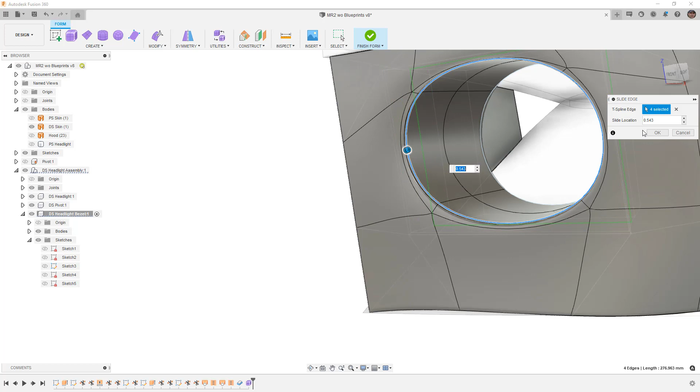I'm going to grab that. I'm going to use slide, and I'm going to try to slide that backwards. This is another tool that sometimes can be a little finicky. You might need to just try it a couple times. And then you can see here, if we go to box display, these edges are really close. So I'm going to use Modify and Slide Edge in box display, maybe help me see a little bit better. Push that back just a little bit and go back to smooth display. So that looks better, we're now getting a pretty good result.

All right, so at this point you probably need to think about a couple things before you get into forms. When we're inside of forms, we need to think about how much control we need, what kind of shape are we trying to match, and likely it's a good idea for you to build that surface or solid body that you're trying to match before you come into forms.

There are, inherently, some things that we can do to manipulate the shape. If you want it to roll down so that it sort of matches the curve of the car, that's a little bit more of a challenge. What we need to do is we need to match this edge, and then we need to freeze it and add more control.

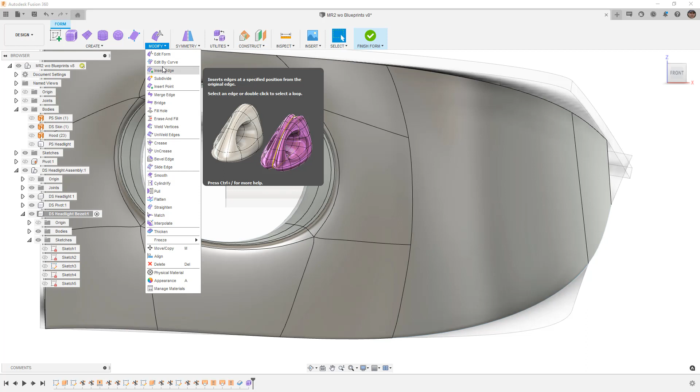So again, if we use pull and try to bring that vertex over to this edge, and we want to freeze this edge to prevent that from moving, I'm going to need to add a lot more control in here. So I need to come in and subdivide these faces.

I'm using exact, which means this edge will stay. And if we don't have enough control, we can always use things like insert point. Notice that it's trying to unfreeze. I'm going to hit cancel - it left that because it doesn't want to unfreeze it, but we'll still be able to play with this a little bit.

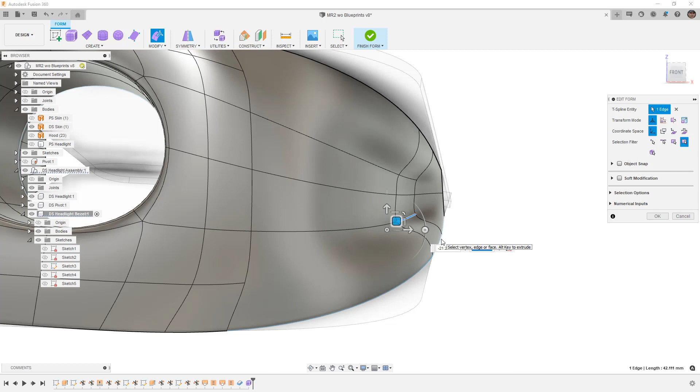So this blue edge and these two edges are frozen, which means I can use modify edit form and bring this in a little bit. Not the best, but it can show you how we can manipulate some of this geometry. If I bring this edge in and try to move it, you can see that the frozen edge stays. One thing we should be mindful of is that we don't have great control over the tangency at that edge. We do have the ability to control it, but we don't have great control.

There are a few ways that we can do it. If we go to a vertex selection, we can grab these handles and do that manually by moving them down. Again, it's not great because it's not automatic in nature, so it's not giving us that level of control based on a surface selection, but we can still do it.

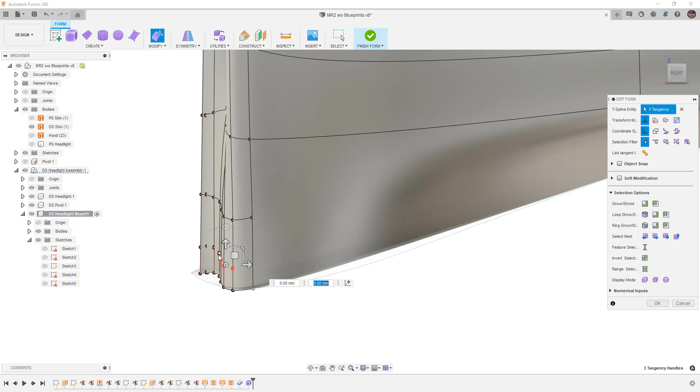When you look at things like headlight bezels, they're not perfect - they have lips and edges and different things that affect their shape. So we can come in and add that level of control by grabbing things like this and pulling them back to get that shape. You can do a lot of that work, and once you're happy with the shape, you can go into tools like pull or match, and pull them out to the edge.

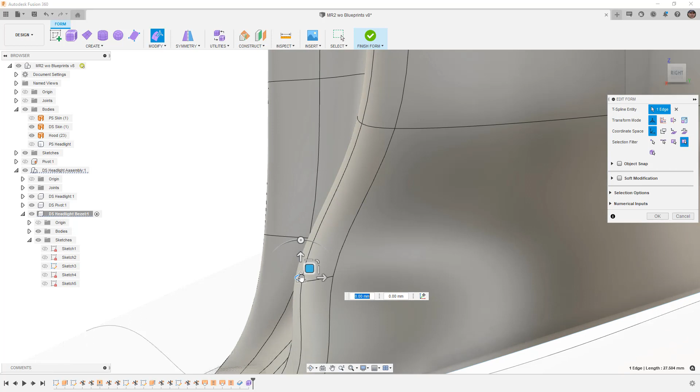That'll get you a little bit closer to matching something cosmetically - if we look at the hood of the car from the side, not super appealing. You might want to take a lot of this and move it back. Let's use the multi-selection - we might want to grab this edge here, pull that one back. That looks a little bit better than just having a big block face here.

But again, it takes a lot of time to get something cosmetically pleasing using this methodology. It's a lot easier to come in and use the surface method, which we turn into a solid body relatively easily. Using this method, we have a lot more control over manufacturable outcomes - it's probably the best way to put it.

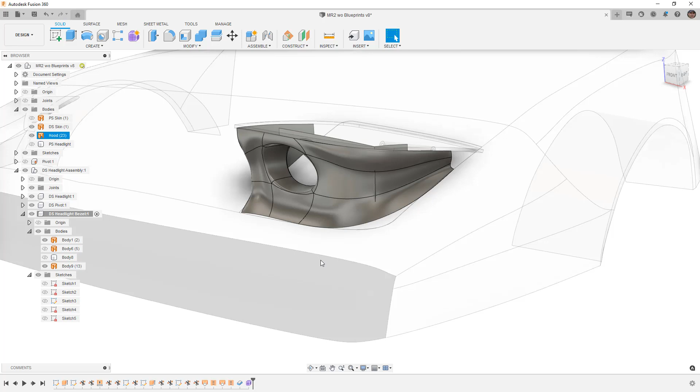Whereas when we use the form, it's going to be a lot of pushing and pulling. You're going to have to get the rough shape and control you want, then use tools like match or pull to match a shape - in this case, the closed version of the headlight bezel. If I were going to design this, I would likely just do it with surfaces because they give me that level of control I'm really looking for.

And I'm going to give you one more example. Again, I know this video has gone on pretty long - we're almost at an hour, but a lot of things are packed in here. So let's look at one more thing with surfacing that could be helpful.

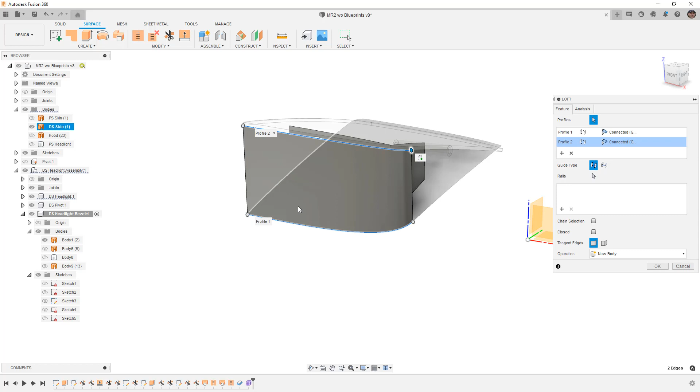So we're going to go back to the loft tool again, and I'm going to loft between this edge and this edge. Lofting between those edges gave us the face we were looking for. But now for profile 1, I'm going to say tangent. Now you can see the tangency - let's flip it the other way, and just pull that handle back.

The tangency is now a much better match for the actual hood. It's looking at the curvature surrounding it, and on the lower edge, you can see what's actually happening is that tangency. We haven't done any tangency on the top, but we certainly could come back and make that one tangent.

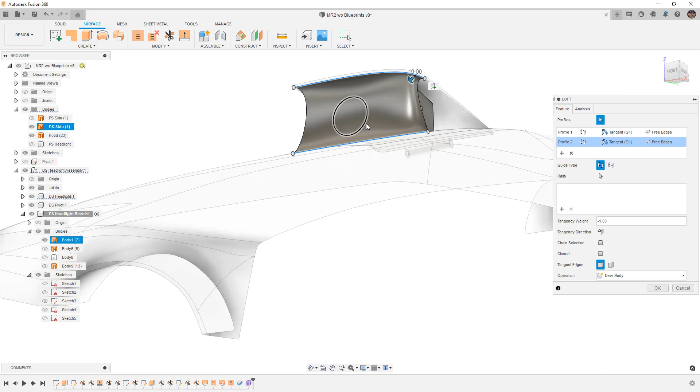We could pull that one in, and you can see that we're getting a more organic looking shape. Now, if you really want to focus on what this thing looks like at the front, you can take these little white dots and pull them around.

There will be situations where this thing isn't going to rebuild, so you'll have to take some time playing with this. Sometimes it doesn't really like it when tangency is used. You might need to go back to connected to try to get that to work. Sometimes it just ends up flipping. The dots represent the start and end profile, and sometimes when they flip, it doesn't like it.

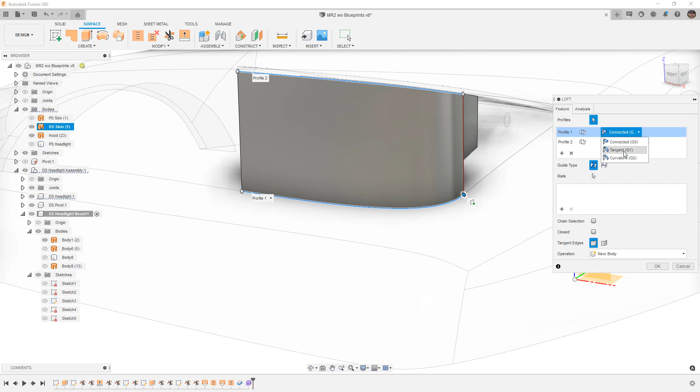But you can fix this by breaking up the surface, splitting it with sketches. If you want to create some vertical lines and split at a couple different positions for the surface, you can do that. You can see here it really doesn't like us changing that input in some cases. But again, with tangency or curvature, we can use the arrow on the screen to flip the direction, and that gives us something that looks pretty good.

When we look at this shape and want to figure out how to carry the rest of it back, we can use tools like Loft, or tools like Patch if we've got a closed boundary. Patch is good to use because the continuity and shape that gets created is pretty nice. But we can also continue to use things like Loft.

So I can select this edge here and loft between them. Then for a rail, I can use my existing surface that we created. It might be hard to see, but I can grab that existing surface to help control that shape. On the bottom side, obviously this crosses over, so we don't like that. For some reason it's having some issue with this shape, but in some cases it works just fine. In other cases, it might be problematic.

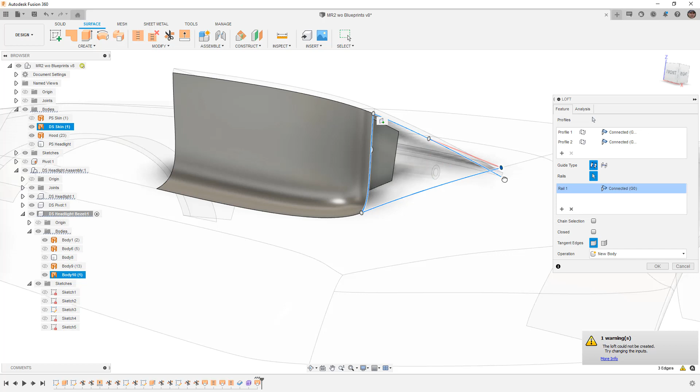You can see here that if we were to split the original surface up, we wouldn't necessarily have that problem. But using the guide rail, we can say we want to carry the tangency back. At profile 1, we want to continue to be tangent on the bottom. It's not working because it crosses back here. But again, that's usually not a problem. I don't really know why it is on this model for some reason.

Just keep in mind that these tools will give you probably much cleaner surfaces, and you are 100% connected and controlling it at the edges. So this is going to be a much cleaner and much better result than using those form tools.

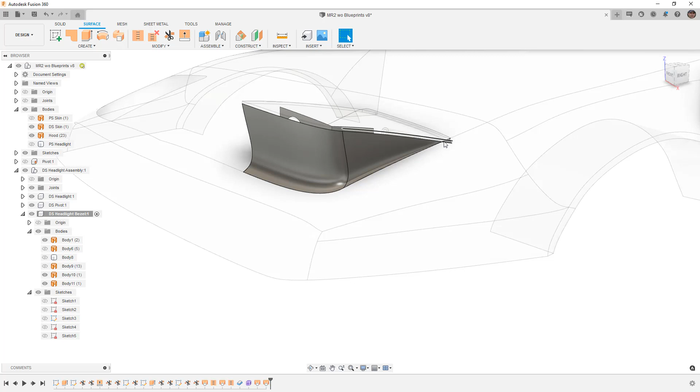And of course we could come back and trim this. The self-intersection isn't great, but it's really based on the fact that the selections we're using cross, so they're going to cross there. But you can see that surface right there is pretty good. That looks pretty good. When you look at that from the side, if you connected the headlight portion of that, that's going to be a really good result.

So I know we're an hour in. That was quite a lot of work. I'm still going to put this entire video up. I might make a shorter one just to show maybe a quick process of how to do this, but hopefully that answered enough questions and gives you enough idea of how you can build this if this is what you are trying to do. Again, my suggestion is to use Loft and surface tools.

It's going to give you a much better result. And remember that these are all still connected and they all are still going to move with the rest of the body. So we still have that headlight popping up and down.

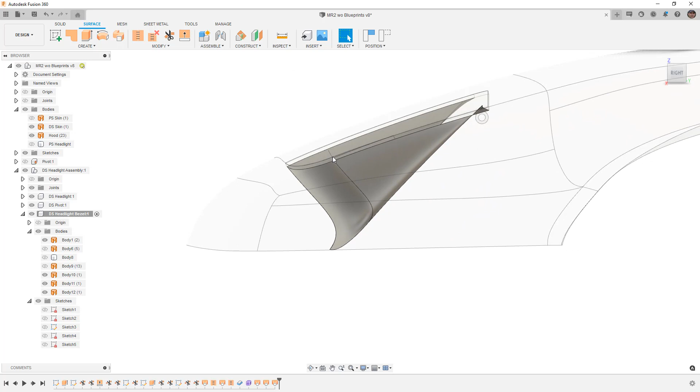Sometimes it can be hard. I still have the surface there, so I have to select that body. But you can see that pops up. It looks pretty good. Pops down and so on.